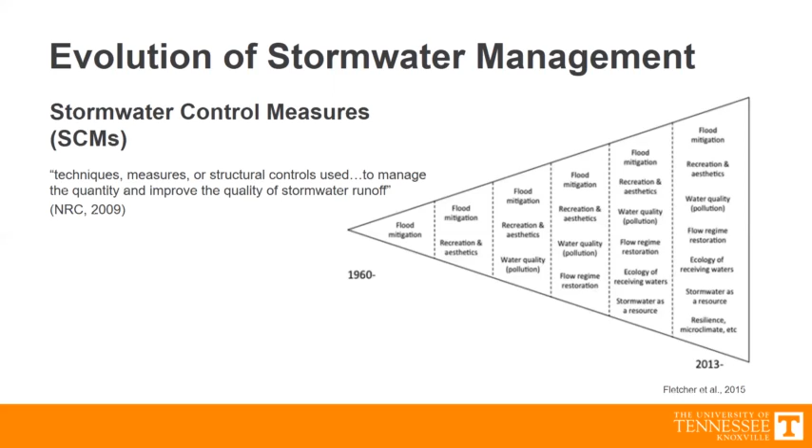As stormwater professionals, we may be interested in stormwater quality, but a lot of times the best way to pitch a project or get people excited about it is aesthetics, recreation, or other attributes. As we push these limits of what these practices can do, we need new strategies and a better understanding of how they function.

This is my research group. We work in the area of sustainable urban water. On the right are a few of our bigger initiatives so far. We've done a lot with tree contributions to stormwater management, working with the Forest Service, since a lot of communities are trying to figure out how they can get credit for tree plantings and what role trees actually play in stormwater management.

We also do a lot with green infrastructure, how we can modify it to get the most out of it, since we're pushing more out of our practices because of all these needs. And how to model them — can we model them well at the site scale? That helps us figure out at the watershed scale what they're actually doing, looking at watershed scale runoff and water quality dynamics. We don't know a lot about how to model water quality in urban areas, so there's still a lot of work to be done there.

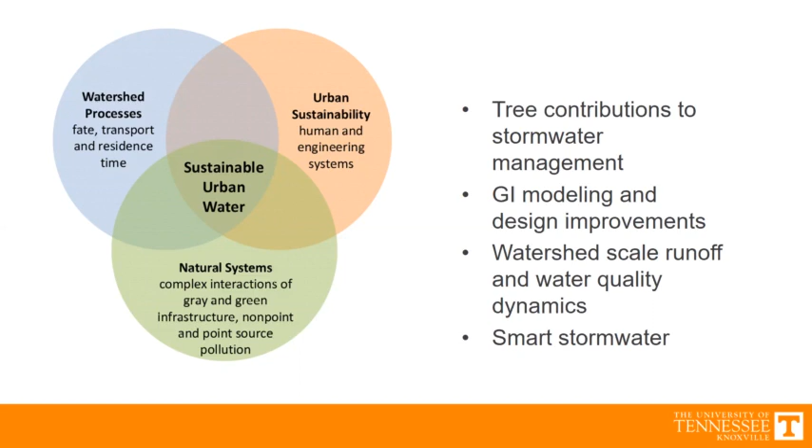Smart stormwater is what we're going to talk about today. This all comes back to the Internet of Things — the idea that we're becoming more and more connected, our objects are becoming more and more connected. There's this interconnection between computing systems, allowing various things to be connected to the internet and to communicate with one another, essentially building what we sometimes call cyber physical systems, meaning there's a computer element to it and a physical element to it.

Aaron does a lot of work with us on our smart cities research, developing sensors and related technology, and this has been applied in a number of different ways.

For wastewater systems, the idea of controls and computer systems is a bit more developed. Some cities have a lot of sensors and areas they control, where they can turn things on and off.

This is an example of the system around Detroit, where my colleague Branko works. They have up to 100-plus sensors around their system and 20 control points, where they can fill up inflatable bladders to keep water stored in certain areas of their sewer, changing the flow regimes in their system.

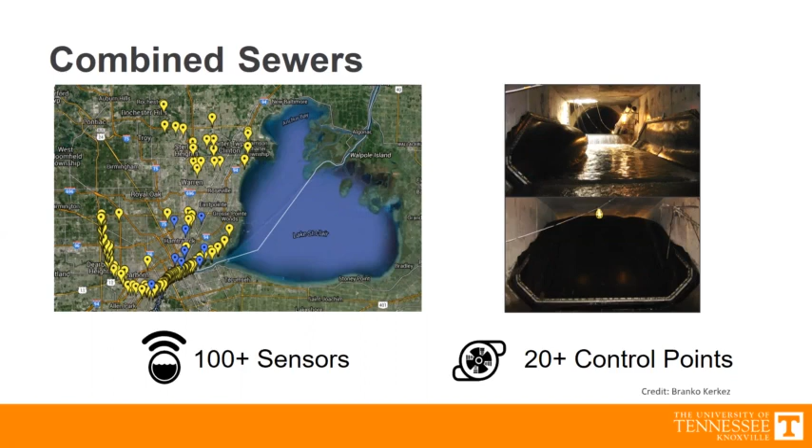This is another picture of him down in Mexico City. They had a project there looking at the quality of drinking water and applying it in a public health environment. They built simple sensors to measure potable water and see what kinds of pollutants were in it.

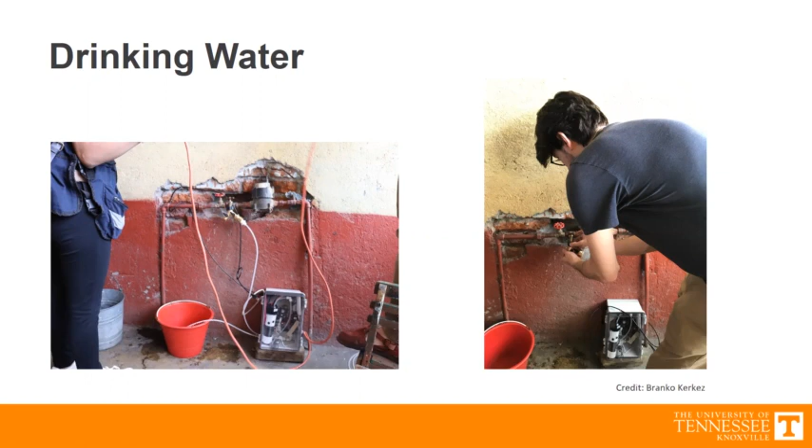This idea of smart cities and smart water is really a developing area, with a lot of places for research and a lot of possibilities.

When we talk about smart stormwater, we're taking those ideas and applying them in an urban context—putting things like rain gauges and soil moisture sensors around our watersheds to better understand what's happening in them and how they're functioning.

We can also start adding control points where, once we get that information, we make decisions. That's the next level—not just getting information in, but making decisions on it and actually changing the way things function based on the data and decisions we're making.

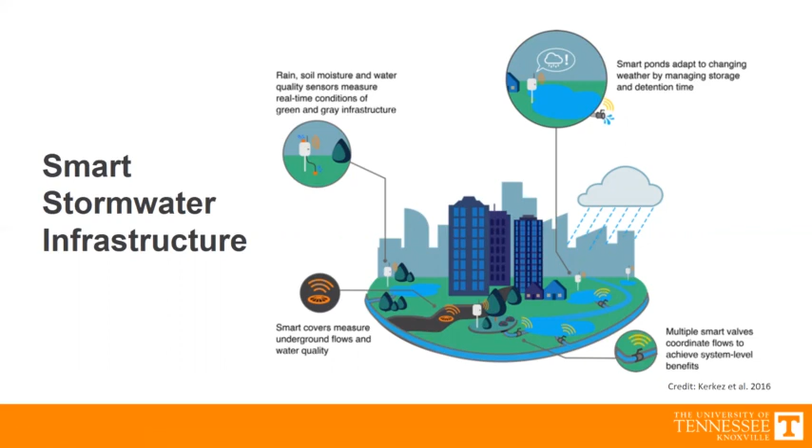A lot of previous work on this has focused on open water systems. This is some of the work in Michigan—one site we work with is a watershed in Ann Arbor, where they have storage units to control water coming out of their ponds. They're focusing on site-scale optimization, really looking at hydrology and hydraulics, and we'll talk about how we're building on some of that work here.

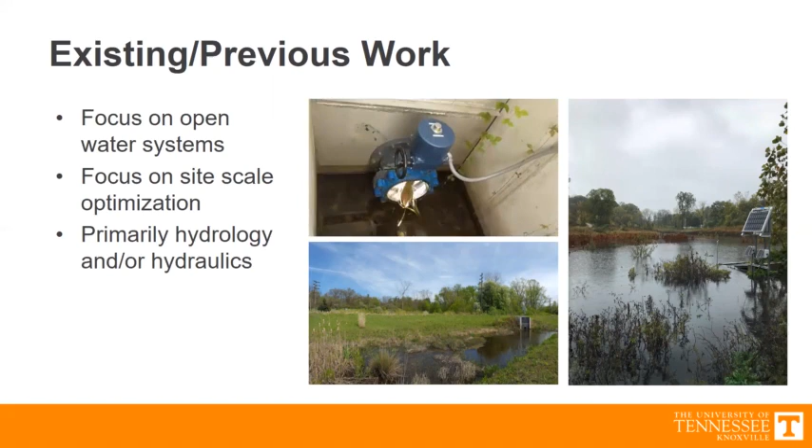The city is excited about the possibilities of reduced flooding and reduced infrastructure expenditures by utilizing the things they already have.

This is our big project with Michigan, Virginia, EmNet, and our group here. One thing I noticed on the proposal is that apparently Branko spelled my last name wrong—if I was NSF, I would have thrown it out right there. Hathaway's name is not spelled right.

Our goal or pitch is that we know a lot about the technologies—we have sensors, controls, and ways to push data around. What's missing is we don't know exactly what happens when you apply this to things like green infrastructure, and we don't know much about what happens if you put multiple things in a row, like 5 ponds acting together—how that works and what's the best way to do it.

And so our project was intended to deal with some of those unknowns. So the first thing that we did is basically looking at GI, like can we go into things like bioretention cells and start changing the way that they function and basically make them function in a more optimal way.

So this is our cross section of a bioretention area. Bioretention obviously has a lot of things going on, but in general we've got this soil media in here, and that soil media has some wet spots, some dry spots. We get a lot of different pollutant removal going on in this system through absorbing nutrients, through converting nutrients, through microbes. And we can change the design.

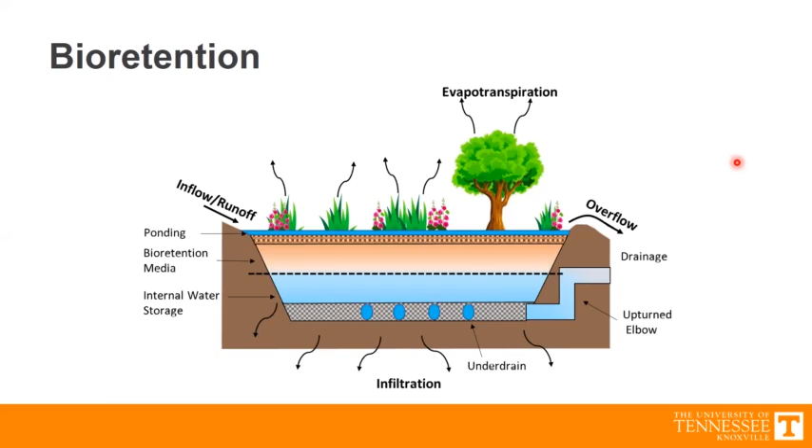And what we did in our project is we basically mimicked those two things. So one is free draining, where we let water basically perk through the entire column and out of the bottom. The other one is internal water storage, where we essentially force water to pond inside of the system.

And what we did on these - a lot of column studies just don't have a way to basically mimic infiltration. So what we did is we put another valve on our system that we can let water slowly seep out of the bottom at the same rate that a clay would seep out of the bottom. So we're trying to get at that idea that water is not just standing inside of this thing, but there's actually some seepage going on also.

And then we have these other two things over here. What these are, we essentially add a valve to that pipe, and we can tell that valve when to open and close based on what's going on in the system. So this one, we've got soil moisture sensors in our column, and we can basically say, when you hit this optimal soil moisture, when you hit the soil moisture that we think is best for microbes to function, we want you to stay at that level.

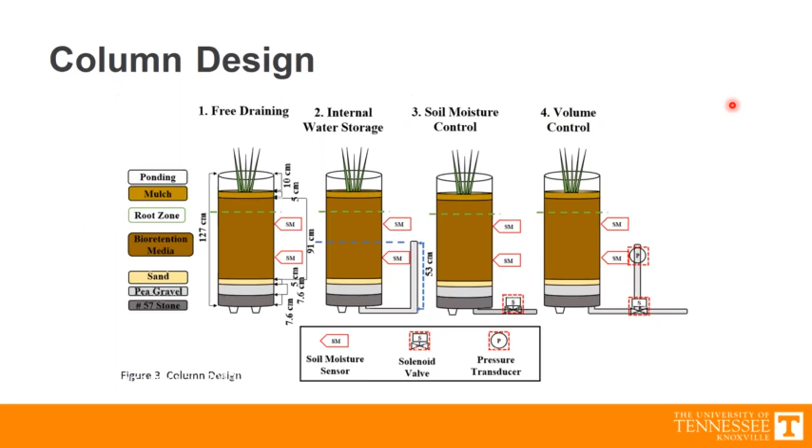So if it goes above that level, start draining some water out. Volume control basically means we want you to stay at a certain water level, and I want you to let water out or close your valve based on what's going on with that water level.

So here's some of our designs here, our columns in the field. You can see we just have these little solenoids that we can open and close.

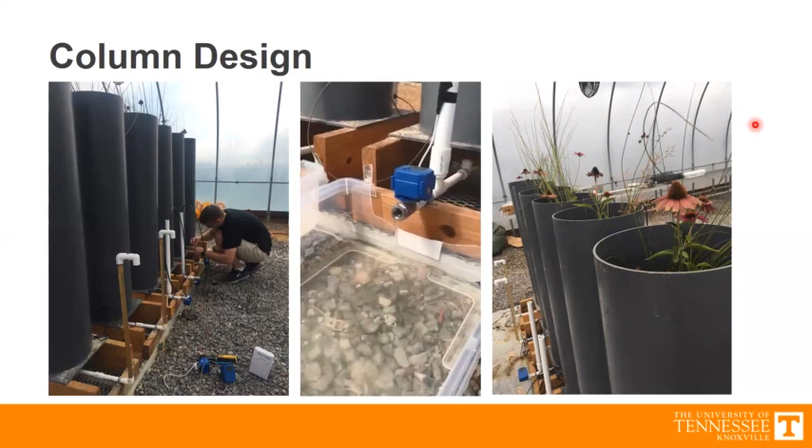So this was quite an effort to get this stuff together. We've got this greenhouse that we basically put all these columns in. And so this is like our little playground now, this greenhouse off of Alcoa. And we've got columns that we can measure evapotranspiration. We can do stuff with these smart controls. We can do all sorts of different work.

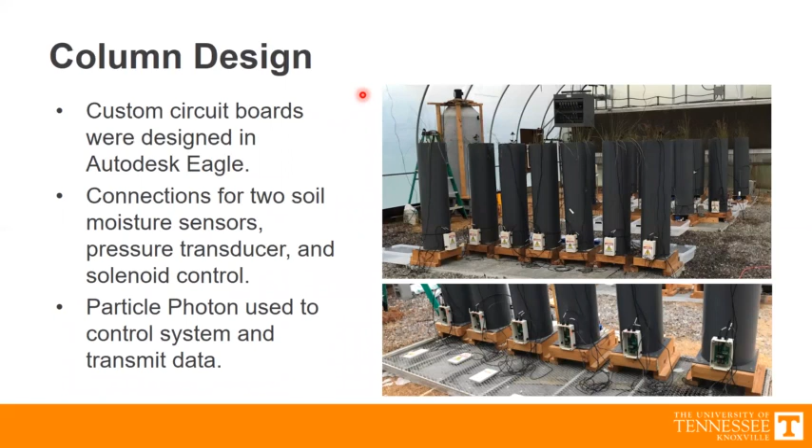You can see this mixer in the back. So we fill it up with water, we put in artificial stormwater, we add some sediment to it, and we can use that and basically distribute it. And then Aaron's actually working on an automated way to distribute it, to make it distributed more along the lines of what it would get during a storm event.

So this is what we do, and this is essentially how these stormwater controls work. You've got some rainfall prediction that happens. So when you pull up your phone and it tells you it's going to rain 0.2 inches tomorrow, or what's the percent chance of rain - those are all predictions that places like NOAA send out that tell you what's going to happen.

And essentially what we can do is we can tell our column, hey, tomorrow it's going to rain about a quarter of an inch, so I want you to prepare yourself. So what the column does is it reads its sensor readings. It says, okay, my soil moisture is at 0.3, and if I get a quarter inch of rain, how is it going to change my soil moisture? And if it's going to be a problem, I'm going to release a little bit of water.

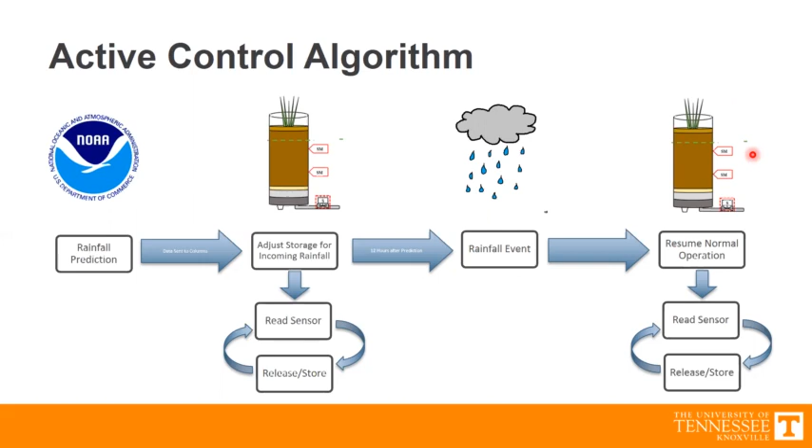Then we basically simulate that rainfall event, and we let this column basically return to its normal operation. So post application, it's going to read all of its sensors again, and it's going to act accordingly.

What we find with our soil moisture dynamics is basically what you'd expect. This is a soil moisture sensor higher in the column, and this one is lower in the column. Upper in the column, with the internal water storage and that constant pool of water, we're promoting higher soil moisture. We have free draining systems that just drain right out of the bottom, giving drier conditions. And in the middle, we have our two control systems acting right in the middle of those two extremes.

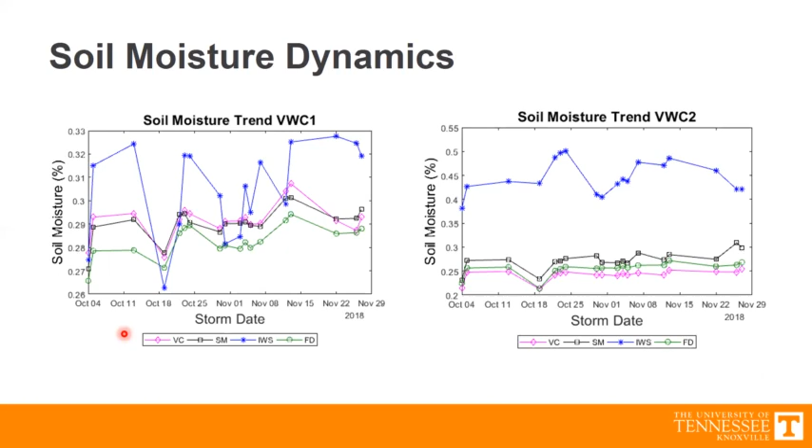Why does this matter? Soil moisture matters for a lot of things: plant growth, microbial action, which goes into pollutant removal. We really care about what's going on with soil moisture in our system, and in particular for water quality we can start looking at things like nitrogen and nitrate removal.

Nitrate removal is going to happen under our wettest conditions. We start getting denitrification happening there. You can see the IWS system, which had the wettest conditions, is also producing our lowest concentrations of nitrate, like we'd expect. Our free draining systems are producing the highest levels of nitrate, which makes sense since it doesn't have a lot of moisture in the system, so it doesn't promote that conversion to nitrogen gas.

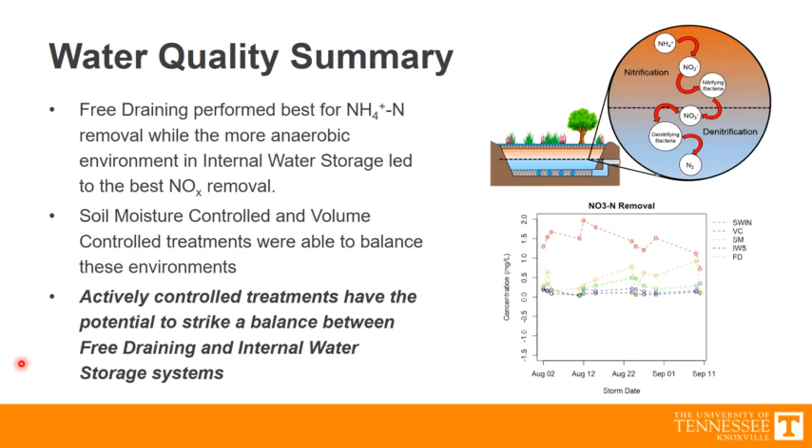In the middle, we're in the middle with our two controls. This was kind of our theme: we're able to balance the difference between these internal water storage systems and these free draining systems with the controls we have. We're basically pulling the best from each of those units and putting them into our systems.

We also do microbial analysis. These microbes here are basically responsible for nitrification, and you can see how they differ depending on the system. Nitrification is generally lower in these IWS systems—we can see it from our soil moisture, from our water quality, and from the microbial community. Free draining systems tend to have higher abundance and higher numbers of nitrifying bacteria.

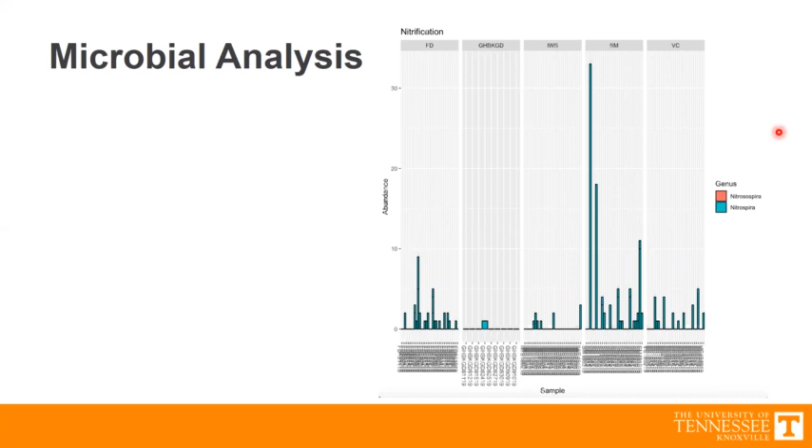And then over here, we actually see that our control systems are functioning really well, and they seem to be a spot where these nitrifiers like it. So we're trying to look at multiple lines of evidence, basically showing what we see in the data and whether it makes sense with what's happening in the microbial community.

We also look at it from a hydrology perspective—how free draining versus these internal water storage systems differ in terms of where the water goes. In a free draining system I don't get much overflow, but I get a lot that's just leaving through an underdrain. So we're learning a lot, not just about the controls, but about how bioretention areas work and ways to get them to work better from a hydrology standpoint and a pollutant removal standpoint.

Other stuff we're working on is moving out and doing more site-level work with ponds, in partnership with Knox County Stormwater. We're focusing in on this on Connor Creek, which is over in Hardin Valley. If you're familiar with that area in Knoxville, it's actively developing—there's a lot going on in that watershed. It seems like every six months there's a new development coming up in Hardin Valley, so it's a pretty fast urbanizing system over there.

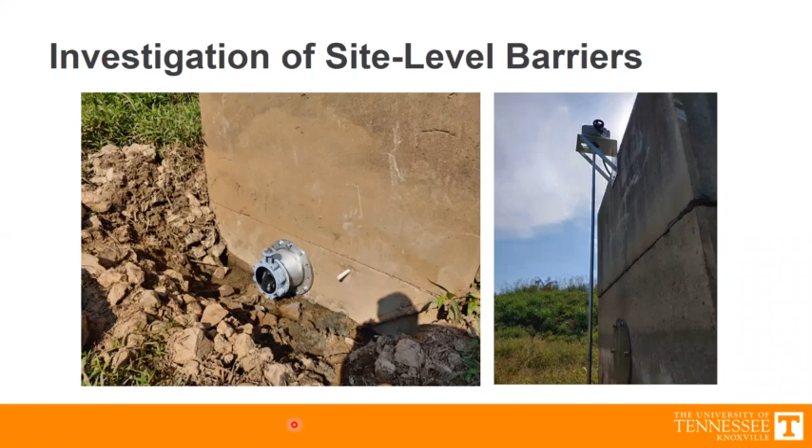So we can either do it manually, or we can give it code and say, hey, if it rains this much, I want you to close. Or if your turbidity reading hits this number, I want you to open again. So this is the type of stuff that we're working with.

We get a big range of water levels that are possible in this system. I'll talk a little bit about why that matters. But you can see it gets super full. And if you look at the difference between this and this, there's a lot of water that gets stored inside of the system, like a huge amount of water.

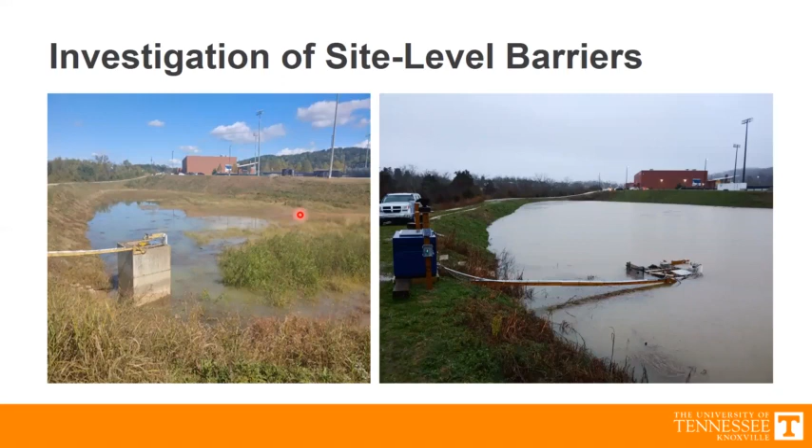So you would think, does this pond make a difference in the grand scheme of things? This is the water level inside of Conner Creek. We've got one that's way upstream in Pellissippi, one upstream of our site, and one downstream of our site. You can basically see that these are just depths, right? So this is 2 or 3 centimeters, only like an inch or 2 that things are going up or down.

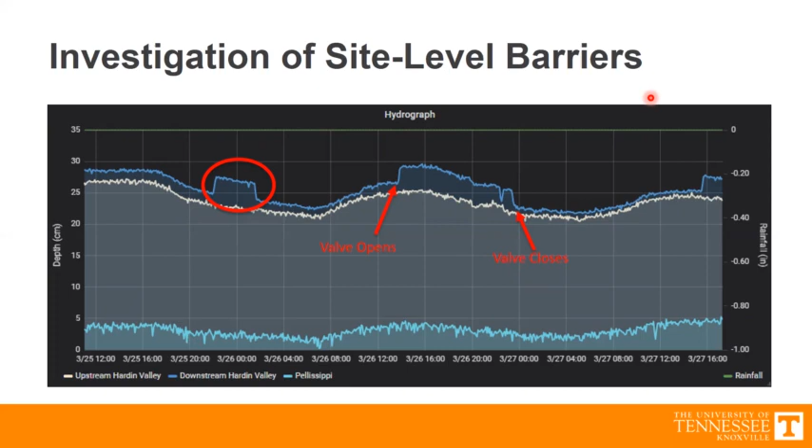But you can see that these ponds do impact the hydrograph. So you do see an impact of what you're doing from a control standpoint inside of the stream, which gives you an opportunity to do some interesting things and try to figure out what your objective is for a stream like that.

So I'm just going to show you. Essentially we've got dashboards that we make for all these things. We can pull up these dashboards and figure out what's going on inside of the creek. So this is real-time data, and this is from that pond. This is happening basically now.

You can see up here in green that we've got some rain that just happened. Right now our valve was mostly open coming up, and it shut for a little while, opened up, and now it's shut again. So it's kind of preparing for this rainfall, waiting for more rain to come in. But it didn't really rain enough out there, you can see the water depth is still pretty minor, so the rainfall has not really done anything for it out there yet.

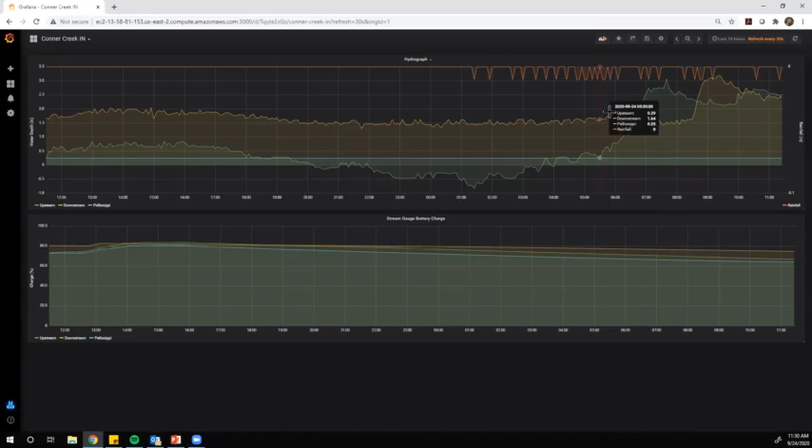So we can look at stuff like that. We can look inside the creek itself. So this is what's going on in Conner Creek. You can see the upstream and downstream levels and what's going on. There's been a rise of a couple inches in the stream, but not a whole lot.

This dashboard's cool because I can take a figure like this and essentially download the data that's associated with that figure, so you can just get the data whenever you want it.

So we basically push this to Amazon, we take it from Amazon and we put it on this - this is Grafana. It's pretty nice, you can take all this data and do different types of dashboards, all different kinds of things like that.

Inside of our turbidity setup, we've got these turbidity meters, and this is how we're getting this data - these Campbell Scientific sensors. Turbidity can be more of a challenge than people realize. A lot of the sensors are optical sensors, which means they cloud over very easily, and all of these sensors can be problematic depending on how they're designed and made.

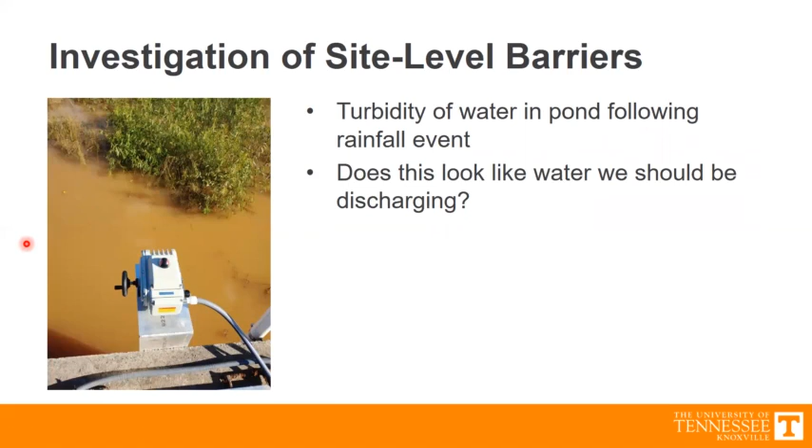Right after a storm event, this is what our turbidity looks like. And so what we tried to do is say, if we basically held water back, can we get turbidity to drop down to some level that's acceptable before we discharge?

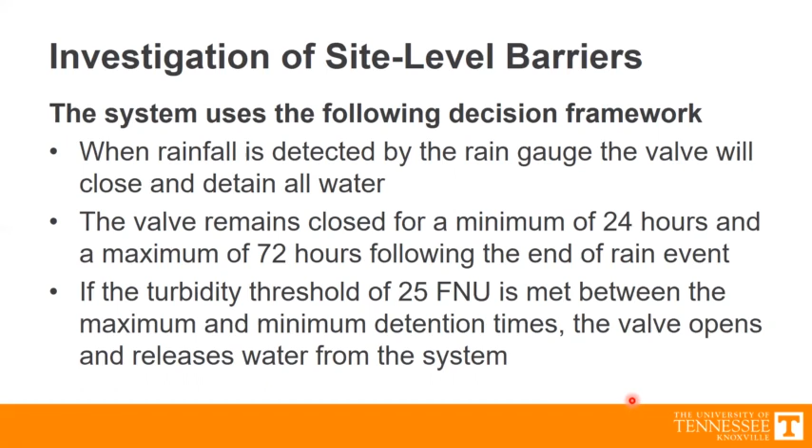So essentially when our gauges show us that rainfall is happening, we close that valve, and then we're going to give it a maximum of 72 hours. At 72 hours, we pull the plug on it and water leaves regardless of what the turbidity is. But our goal is basically to hit 25 FNU before we let the water go - so we've reached some cleaner water before we let it go.

Here's our example of a pond hydrograph. You can see the pond filled up for some event, our turbidity went up, and then it's going to drop over time. Fairly small particles take a long time to drop, but you can see it keeps on moving, and then it hits below 25 at some point, and then we're like, okay, we can start discharging now.

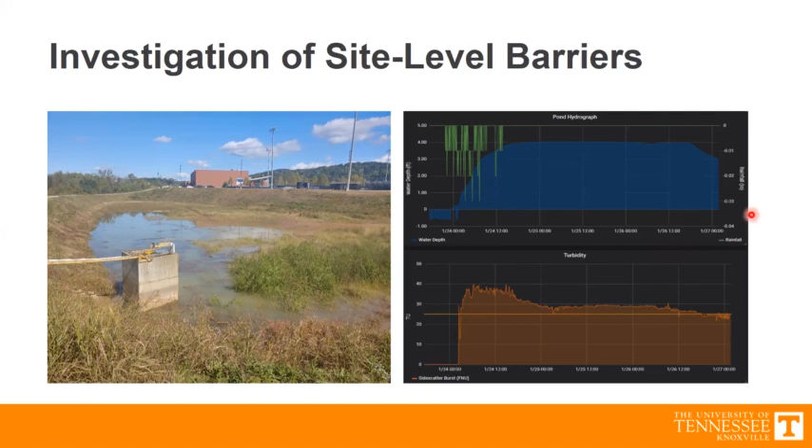So we're trying to basically relate pond function to water quality to some degree, where turbidity is one of the easier things that we can tackle first before we start tackling more challenging things. 60% of the events that we measure, we're able to meet that 25 FNU turbidity threshold, and it's just simply by holding water back and not allowing it to release right away.

So the idea is that these ponds work through gravity. They fill up, you size the hole a certain size, so they're going to drain based on gravity and whatever size hole that you made. And now we're kind of looking at that as an opportunity to adapt that system and let it function in the way that we want.

So our next kind of battle is to understand - this is our pond that we've been looking at the whole time - what happens when we start controlling multiple ponds? We're just starting to look at this right now. We saw the impact of one pond in a stream; how do you basically sequence these ponds together to come up with some outcome?

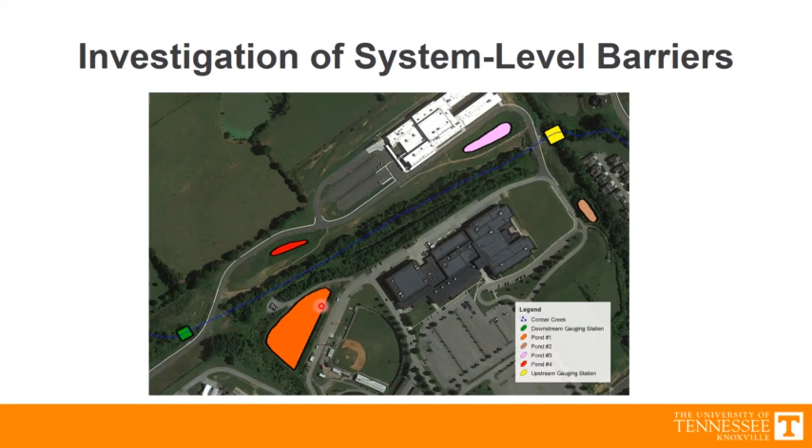There's been studies and modeling efforts that have shown that in watersheds, if you just put ponds like this in random locations, you can actually end up with higher flows inside of your stream than you would have without any controls. The idea is these ponds' discharge can coincide with each other and cause more of a problem. So what we're trying to think about is, can we control these ponds in a way that lets them act together to reach some outcome in that stream?

So these are the other ponds that we're monitoring over there - you can see our boxes and our stuff over there. So what types of things can we control, and how do we manage connected stormwater ponds in a watershed?

It brings us back to what is the objective of an urban stream, and what types of things are we controlling for. Are we supposed to control for flow, for erosion in the stream, for ecology? We may choose to manage things differently depending on what that objective is. So there's a lot of work to be done to figure out what an urban stream is supposed to look like in terms of flows.

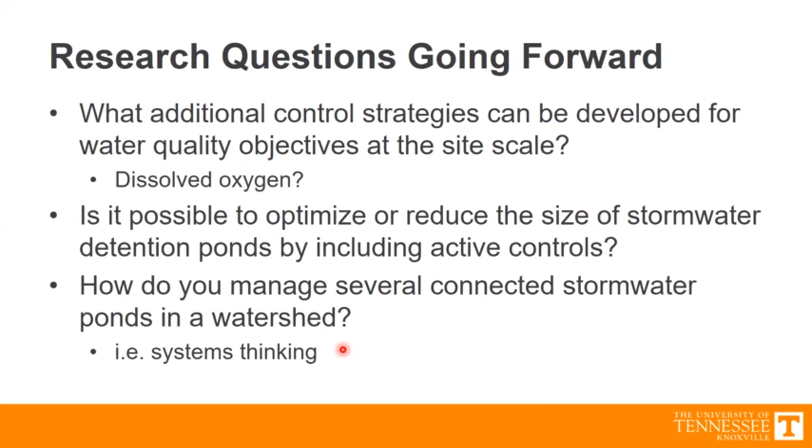When we just talk about infiltration and removing water out of the system, we sort of assume that the stream is going to have some benefit, but we don't ever really follow up to make sure that the stream actually gets the benefit that you think it's going to get.

The other thing in this project, and we work with City of Knoxville, Chris Howley on this, is social barriers. I don't know if anyone on here has gotten one of these flyers, but we had these flyers that went out in town about people's perceptions of stormwater controls, and we had a bunch of different ones.

And it helps us put not just engineering, basically, what am I trying to think of, our maximum and minimums of what we're allowed to do. We're trying to put our controls on, what's the most I could pond water and still have people appreciate that resource? What's the least water I can have in the system and still have people appreciate it? So there's some balance there about what people think about the system, and actually trying to manage based on what people think and what their perception is of the system.

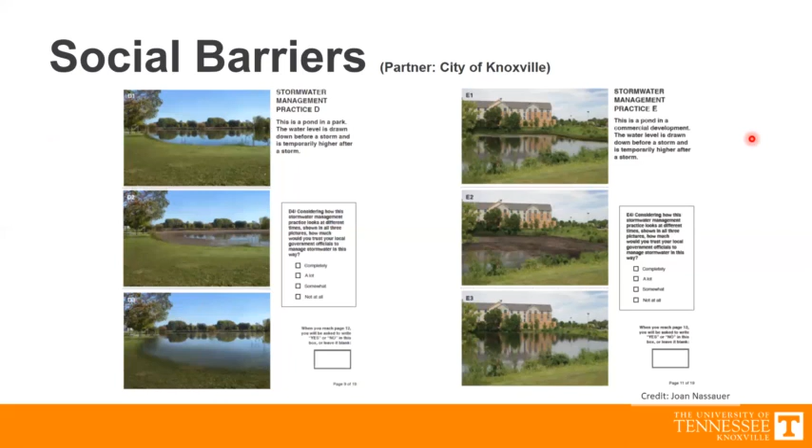So these are actually renderings that were done. Basically the group at Michigan took a picture, and I think this one is the actual picture, and then these other ones are just ones that they basically rendered. Same thing over here, there's just differences in rendering. So we sent out that flyer, and they're going to be working up that information about how much or how little we control.

The last thing I wanted to talk about today is another little project we've started on, and we don't have a lot of information on this, but it's another application of using science and sensors and data, and that's GI maintenance.

What we know from working with lots of different municipalities is that maintenance is a huge burden. We work a little bit with City of Nashville, and I know for their program they have multiple staff dedicated to inspection and maintenance. It's a huge burden, and each one of these sites maybe gets inspected once a year or once every couple years.

So what if we had a sensor array that was cheap and that people would implement with these different practices that could tell that there's some issues happening before they actually happen, or that could notify people when there was something that needed to be looked at?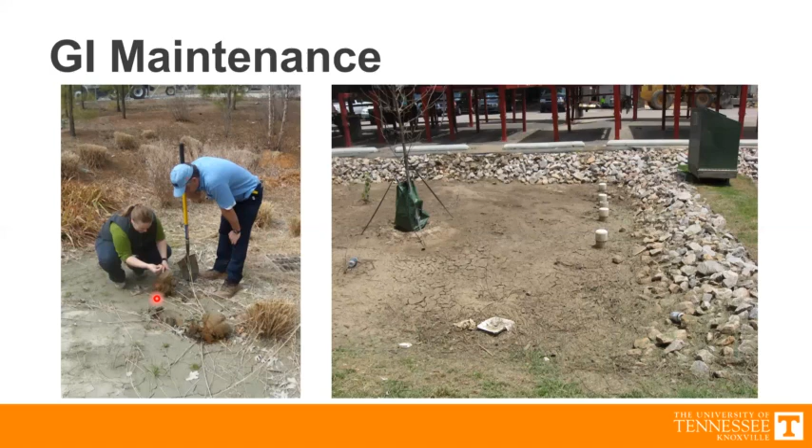For instance, we have light sensors that we could put under a tree like this and basically tell if that tree has leafed out or not, based on how much light penetration you've got from your sensor. Over here, if you have a soil moisture sensor or a depth sensor in this system, you should be able to tell if it's clogging, since you'd see different signatures in that sensor data. That's what we're trying to get at in some of this.

We just got this project going, but essentially we have these columns where we put all this different stuff in. We've got these little pools up top, ponding areas where we let water pond. Within that, we've got a float switch, an ultrasonic sensor, soil moisture sensors, and pressure transducers, and we're trying to monitor a bunch of different data streams to figure out which ones are important and which ones might show us that maintenance is needed.

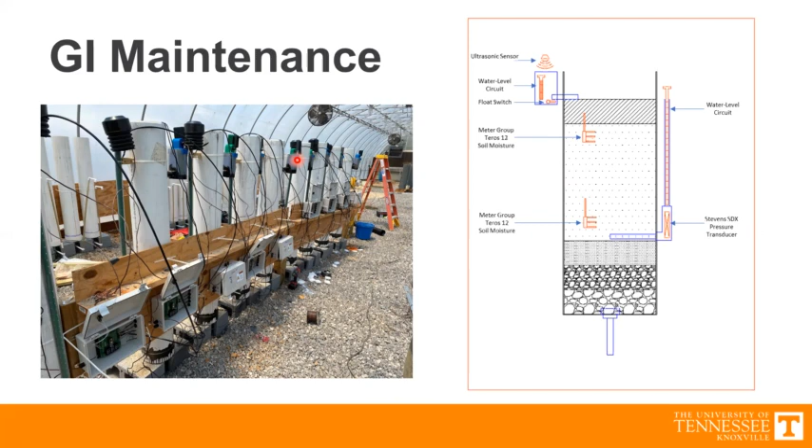So these are sacrificial lambs, most of them. We're going to be doing things to them on purpose to try to get them to not work anymore — like dumping a bunch of dirt and clay in them to try to get them to clog, and then seeing what the sensors do as a result of that clogging. It helps us take a data stream from a normal system and a data stream from one that's clogged, and we can compare those two things, or look at how something has clogged over time and start assigning patterns to it.

So here's a data stream of soil moisture from a column system, and this is typically what you want to see: you get a rise in soil moisture, and then as things seep through the system, you get a slow drawdown. Next event happens, slow drawdown, etc. What we contend is that your soil moisture, or water content, should change if the thing is clogged — it's probably going to go from something like that to something that more slowly increases in water and then slowly declines over time.

This is why I work with systems engineering — they're really good at looking for patterns and making predictions based on data. They're experts at taking data streams, looking at how the data is shaped, changes in the data, anomalies in the data, and deviations from expected function. That's what they're really good at. So we work with them to help identify patterns and anomalies inside of data streams like this.

One thing you realize when you start monitoring is that it's easy to collect a ton of data, but harder to make sense of it and know what to do with it. So when you start working with data streams like this, it's a lot easier to have something you're looking for to begin with than to just search for things in the data afterward. Having your hypothesis or theory on what things are going to look like is really important.

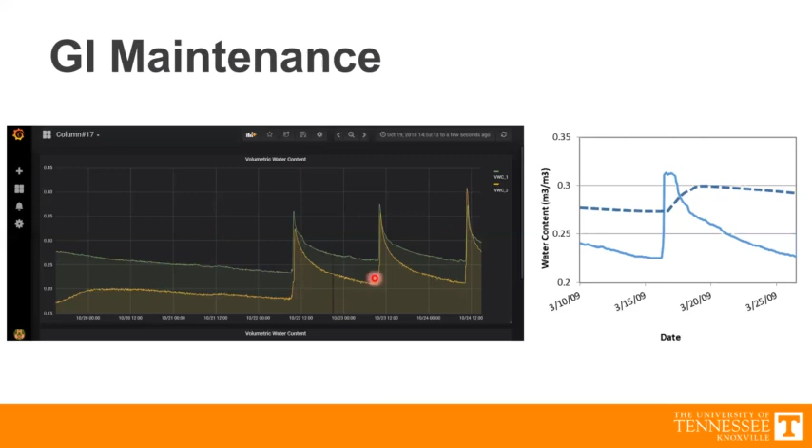So this is an example of the types of things they do. This is one of our soil moisture sensors here, in blue — they're taking data like this. This is soil moisture at two different depths: the yellow is about one foot deep in a column, and the green is two feet deep inside a column. So what they can do is stuff like this.

They use these machine learning techniques — they took this blue line, the soil moisture at two feet deep, and took a data stream from the one foot deep sensor, and basically tried to predict what's happening two feet down inside the soil media based on what's happening one foot down. So they're comparing, and you can see they're able to predict this extremely well based on just big data streams. They're taking one thing — I know my soil moisture one foot deep — and predicting what's going on at other depths just based on that one data stream.

So we're working on ways to not only do that, but to incorporate rainfall as well, where we would say, based on the amount of rainfall, this is what we think will happen with soil moisture.

So we're trying to do some prediction inside of our data streams. The whole goal, and we have some proposals on this idea, is to inform municipalities and make their job easier and more effective. You've got a dashboard that sends you a note when, say, bioretention area A is acting weird—its soil moisture readings have changed over the past year and now it looks like it's getting clogged. We send a note saying you should go look at this one because there's no leaves on the tree and it might be dead, or there's clogging in the system, so we can go check it out.

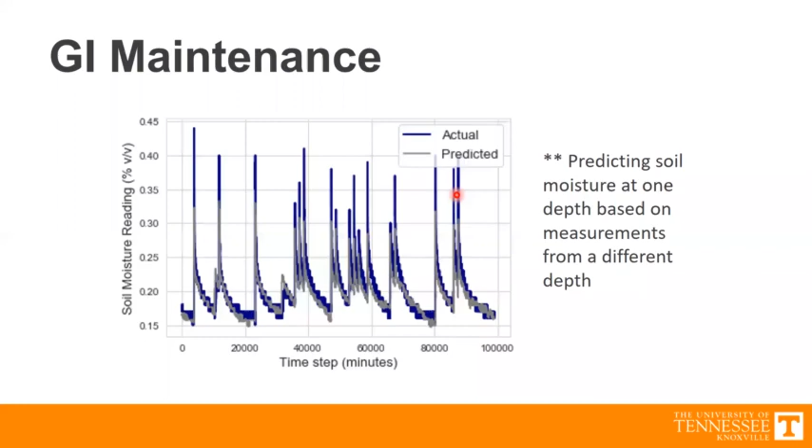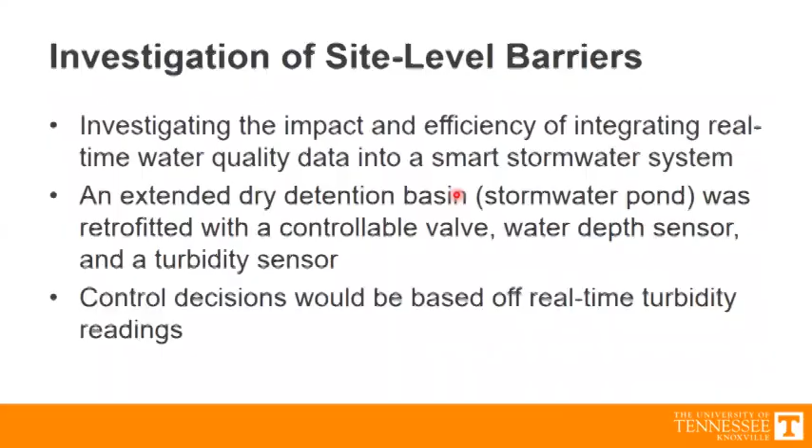Some of the new sensors coming out—we do a lot with these particle boards. Let me see if I can find one. Particle is basically these boards, and they have ones called Borons. Borons are essentially ready to go with internet connection—Boron has its own relationships with cell phone carriers, so you can transport data through the Boron system, and they take care of all that stuff with the cell carriers behind the scenes. You can get a Boron chip and pay them a fee based on how much data you're transferring.

I believe Walter Graff had a comment or question. Thanks John, good presentation you've got going here. I just want to make a comment—this sort of work really helps bridge the gap between green infrastructure and built infrastructure. I think it's a huge improvement in helping reduce the size of the conveyance systems we need, when you can use green infrastructure to help mitigate overland flow to our storm sewers, and also help prevent combined sewer overflows.

Yeah, people who know me know I'm a green infrastructure guy. I love natural systems and the idea of implementing them to take care of stormwater issues. The reality is that's probably not always going to be the right solution for a given situation. There are other opportunities to do innovative things that build on green infrastructure, like incorporating it with ponds, or allowing ponds to help mitigate stream hydrology issues. The more tools we have, the better, in terms of stormwater management.

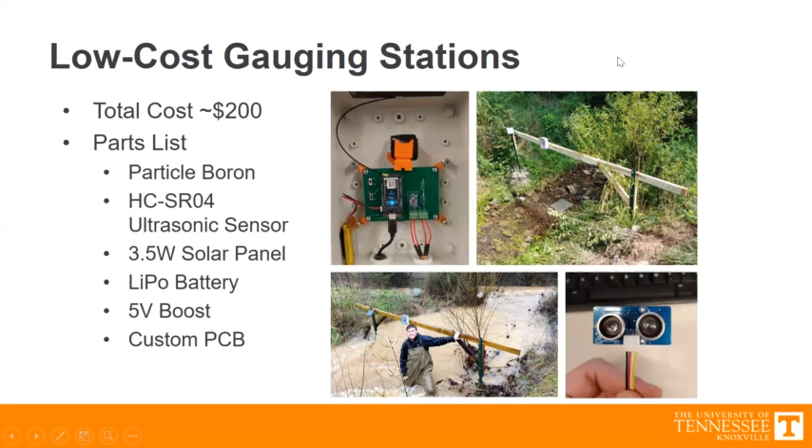You guys have a great afternoon, and thank you so much, John. I really appreciate it, and thank you for attending—I'll see you next time. Thanks for the opportunity. Yeah, thank you, it's been great. Okay, thanks y'all, thank you.